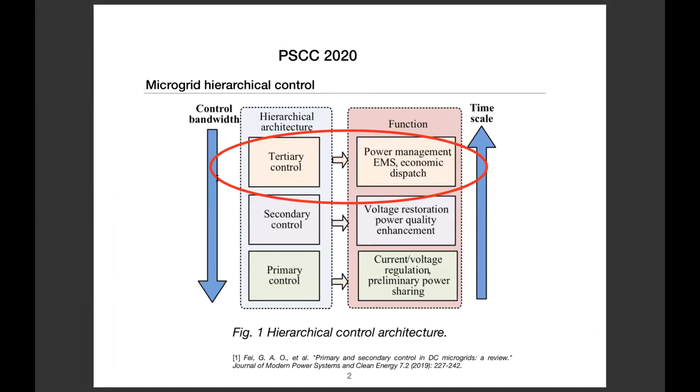So I am very pleased to present you the paper, Coordination of Operational Planning and Real-Time Optimization in Microgrids. So this paper focuses on the tertiary control level with the energy management system that aims to compute optimally a planning of set points to the microgrid device based on economic and technical criteria. More specifically, a two-layer approach is considered to address this task. It consists in a schedule and a dispatch layers.

The schedule layer computes on a quarterly basis an economical operation scheme for the 24 hours ahead with a 15-minute resolution. The dispatch layer computes the set point in real time based on the scheme and the microgrid status. The key question is how the schedule and dispatch layers interact. This topic has been intensively studied in the literature. So first we'll go with the problem formulation.

So the problem formulation can be defined for a given microgrid design and configuration as operating a microgrid safely and in an economically efficient manner by harvesting as much renewable energy as possible, operating the grid efficiently, optimizing the service to the demand side, and optimizing other side goals. So we made a few assumptions in this paper.

First, the controller optimizes economical criteria, which are only related to active power. Secondly, fast load frequency control, islanding management, as well as reactive power control are not in the scope of the study. Thirdly, the battery aging is not taken into account and is supposed to behave ideally with charging and discharging efficiencies. Finally, the microgrid is a price taker in the energy and reserve markets.

So here you can see the abstract formulation of the microgrid control that is provided by equation 1. A_t is a set of actions at any time t over the lifetime of the microgrid. The action should be taken as frequently as possible to cope with the economical impact of the variability of the demand and generation side, but not too often to let transients vanish. Typically, a few seconds is fine. Delta t is the time delta between actions and is not necessarily constant.

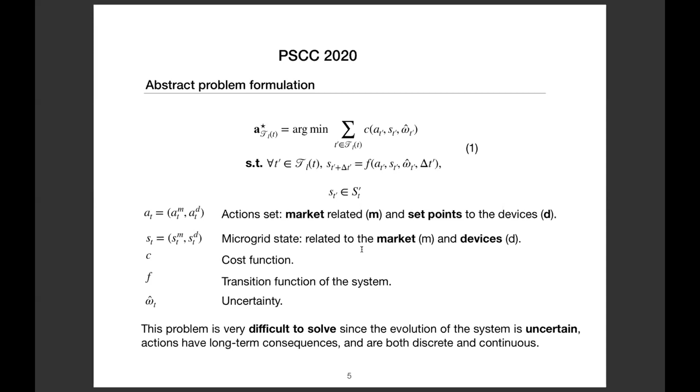C is the cost function that gathers all the economical criteria considered. And finally, F is a transition function that describes the physical and net position evolution of the system. This problem is quite difficult to solve since the evolution of the system is uncertain, actions have long-term consequences, and are both discrete and continuous. So now let's switch to the proposed method.

As forecasts are valid only for the relatively near future and optimizing over a long time horizon would anyway be incompatible with real-time operation, this problem is approximated by cropping the look-ahead horizon to 24 hours. However, market decisions must be refreshed much less frequently than set points. We thus propose to decompose the problem in an operational planning problem that computes every 15 minutes market decisions and the value function for the 24 hours ahead, and a real-time problem that computes every few seconds set points based on the value function and the microgrid status.

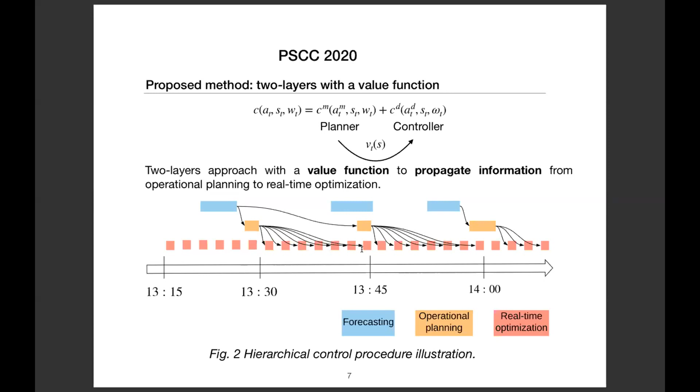The real-time optimizer computes only set points within the current market period. So we consider only one period for the real-time problem. Figure 2 illustrates this process. This value function propagates the information from the operational planner to the real-time controller. Therefore, equation 1 is decomposed into equations 2 and 3. And the value function represents the optimized value of 2 as a function of the state of charge of the problem. And if we make the assumption that equation 2 is modeled as a linear program, this value function is thus convex and piecewise linear.

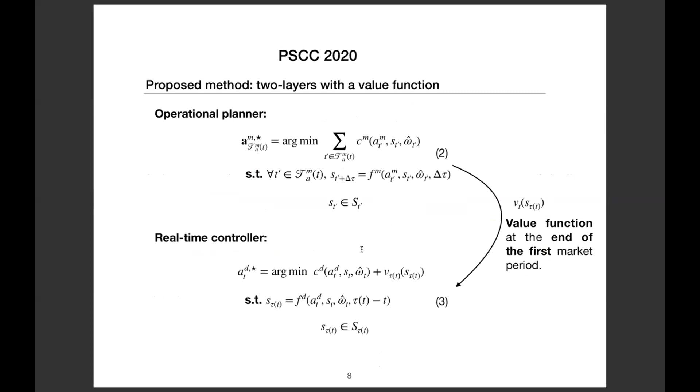The objective of the operational planner is composed of immediate and delayed costs. The immediate costs take into account different revenues and costs related to energy flows, the cost of shed demand, steered and non-steered generation, the revenue from selling energy to the grid, the cost of purchasing energy from the grid, and the cost for using the storage. The delayed costs are composed of the peak cost and symmetric reserve revenue. Delta P is the peak difference between the previous maximum historic peak and the current peak within the market period. The symmetric reserve is provided to the grid within the current market period.

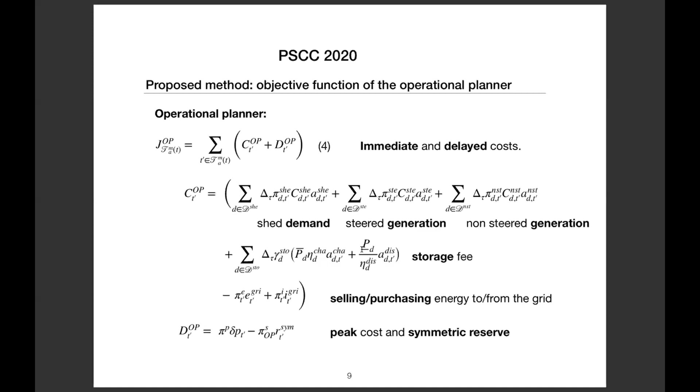The objective function of the real-time controller is also composed of immediate and delay cost and the value function. The real-time optimizer immediate costs are the same as the operational planner immediate costs by replacing the time index and replacing delta tau by delta t and considering only one period of time. The real-time optimizer delay cost is composed of the peak cost and symmetric reserve penalty cost.

Every evaluation of the objective of the planner with a fixed state of charge at the end of the first market period provides us a supporting inequality by taking the dual variable that is called mu. Thus, the value function is approximated by a set of cuts or inequalities. It is like a parametrization of the right-hand side of the objective of the planner, in fact. So by this way, we can approximate the value function.

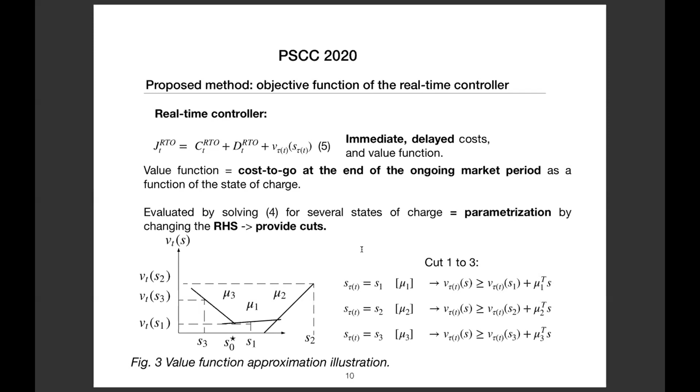Okay, let's consider now the case study. The PV and consumption data have a 1 second resolution, meaning that the real-time controller could compute its optimization problem each 5 to 10 seconds in operational mode. And thus, we consider the case study of the MIRIS microgrid. It is located at the John Cockerill Group's international headquarters in Belgium. It is composed of PV, several energy storage devices, and a non-sheddable load.

The load and PV data we use come from on-site monitoring, 27 days in total. All data, including the weather forecast, are available on the Kaggle platform. You have the link here. Figure 3 illustrates the PV and consumption on a specific day, June 12, 2019.

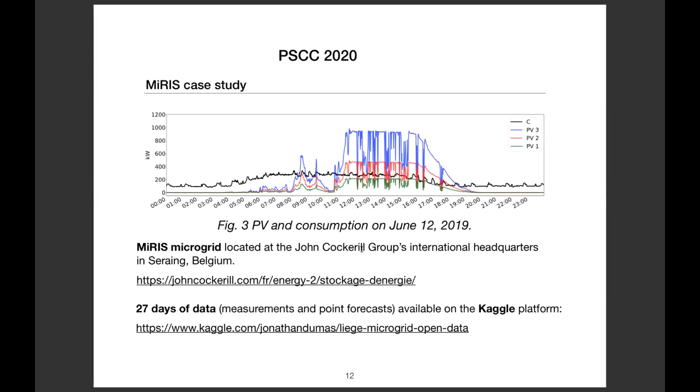The peak mechanism is taken into account with a constant peak price that is set to 40 € per kilowatt and an initial maximum historic peak of 150 kilowatts. Storage systems are initially fully charged, and the battery capacity is set to 1,350 kilowatt-hours.

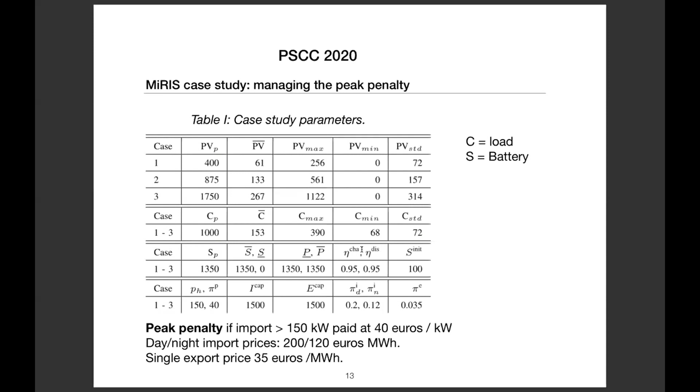The operational planner computes the planning based on PV and consumption 24 hours ahead, based on a 24-hour ahead forecast. The computation time of the real-time controller on a regular computer is around a few seconds, and the operational planner around 20 seconds. So in total, the simulation computation time is up to a few hours when considering the entire dataset.

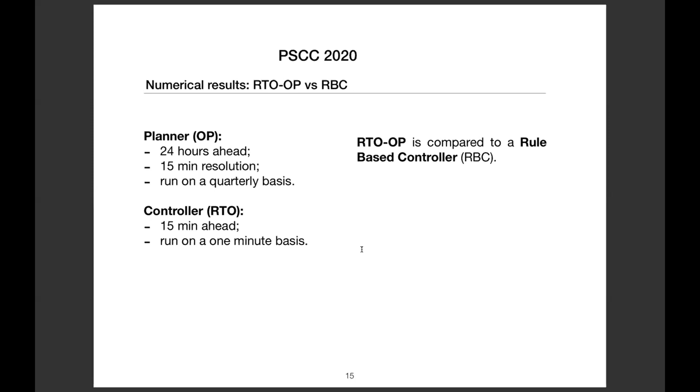The weather-based forecast methodology consists in two classic deterministic techniques: a recurrent neural network that is implemented with the Keras Python library, and a gradient boosting regression that is implemented with the scikit-learn Python library. This model uses as input the weather forecast provided by the Laboratory of Climatology at the University of Liège. To estimate the impact of the PV and consumption forecast error on the controller, the simulation is performed with the planner having access to the PV and consumption future values.

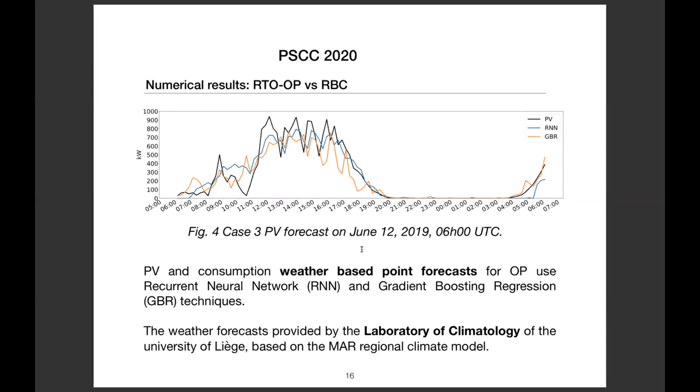So here we have the result by considering the peak management without symmetric reserve. The peak cost strongly penalizes the benefits as it applies on all the year ahead once it has been reached. When the planner uses perfect forecast, it provides the minimal peak cost, whereas the rule-based controller provides the minimal energy cost in all the cases. However, the perfect planner achieves the minimal total cost composed of the energy and peak cost. That is expected because it is an oracle, it knows perfectly the future.

The simulation illustrates the impact of the forecast on the RTO-OP behavior. The RNN forecaster provides the best result, but is still a long way from managing the peak as the oracle due to the forecasting error. These cases show that the RTO-OP controller optimizes PV storage usage and thus requires less installed PV capacity for a given demand level. This result was expected as the peak management is not achieved by the rule-based controller and becomes critical when the PV production is smaller than the consumption.

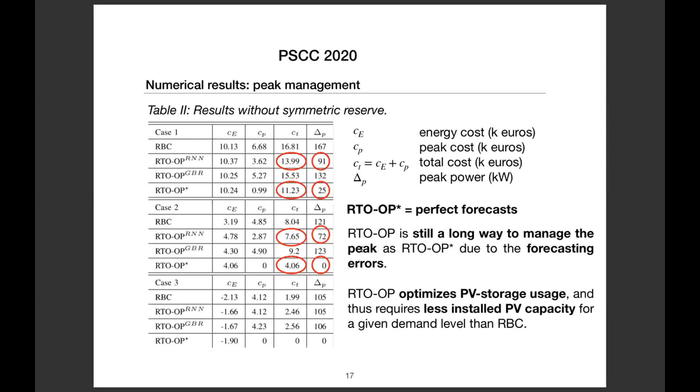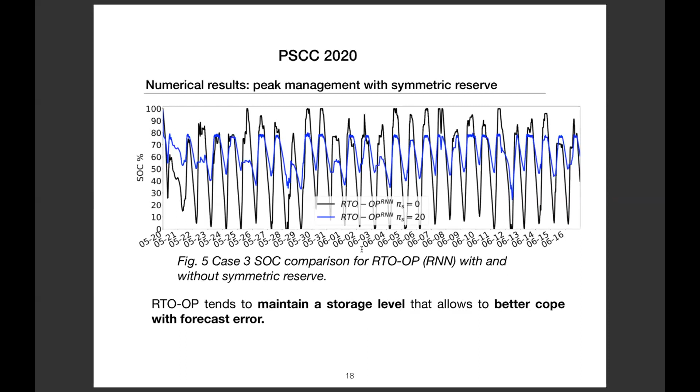Now let's consider the numerical result when we set the symmetric reserve. So here, the price of the symmetric reserve is set to 20 euro per kilowatt. And as you can see, the RTO-OP tends to maintain a storage level that allows it to better cope with a forecast error, as we will see on the next slide. So here we only consider the RTO-OP with the RNN forecaster, and you can compare the results with and without symmetric reserve. The peak power has decreased in all cases.

However, this behavior tends to increase the energy cost if the PV production is important in comparison with the consumption, such as for case 3. Indeed, the controller will tend to store more energy into the battery instead of exporting. That is why there is an economic trade-off to manage the peak and the reserve simultaneously, depending on the valorization or not on the market of the symmetric reserve.

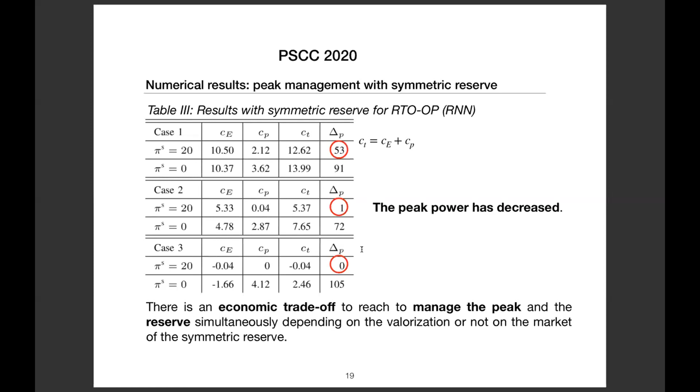The reserve can also be valorized internally to cope with unknown or difficult-to-forecast events, such as a sudden drop of the export or import limits due to loss of equipment or grid congestion. So this case study was just to illustrate the two-layer approach, but it could be used for other kinds of application.

So we have seen that the value function computed by the operational planner based on PV and consumption forecasts allows to cope with the forecasting uncertainties. The real-time controller solves an entire optimization problem, including the future information propagated by the value function.

This approach has been tested on the MiRIS microgrid case study with PV and consumption data monitored on site. The results demonstrate the efficiency of this method to manage the peak consumption in comparison with the rule-based controller. This test case is completely reproducible as all the data used are open, PV consumption monitored, and forecast, including the weather forecasts that are available on the Kaggle platform.

The proposed approach can be extended in several ways. First, the deterministic formulation of the operational planning problem could be extended to a stochastic formulation or robust formulation in order to cope with probabilistic forecasts. Secondly, the balancing market mechanism could be introduced. Finally, the approach could be extended to a community by considering several entities inside the microgrid. And then we could introduce kind of green KPI, key performance indicator, to try to meet the challenges of the IPCC reports.

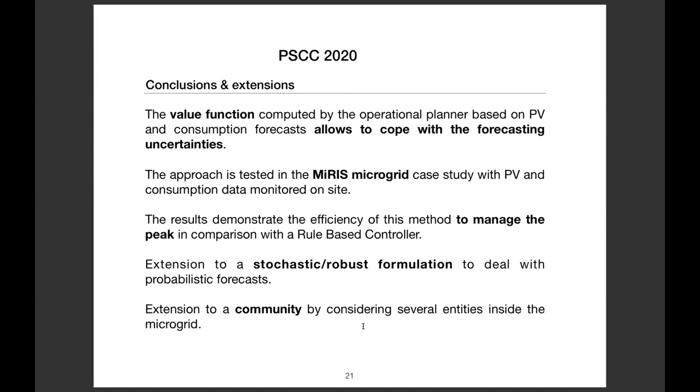Okay, we have a first question, Jonathan. I think you see the questions. Maybe yes. I can read it. It's from Jordan Olweger. So why using neural network for forecasting PV if you already have weather forecast?

Yeah, this is a good question. Right. Yes, it is true that as we have weather forecast, we have the global solar irradiation, and we also have the air temperature. So we could use a parametric model with the parametric law to directly compute the PV power. But by using a neural network, you can take the last measured value of the PV production. And so you can increase your forecast accuracy by taking the last state of the system. So it is a way to improve the forecast accuracy.

And also the recurrent neural network has a specific time gate inside it. So it is quite powerful when you take information in the past. So this is why we decided to use such a machine learning approach instead of a parametric model. I hope it answers the question. Thank you, Jonathan.